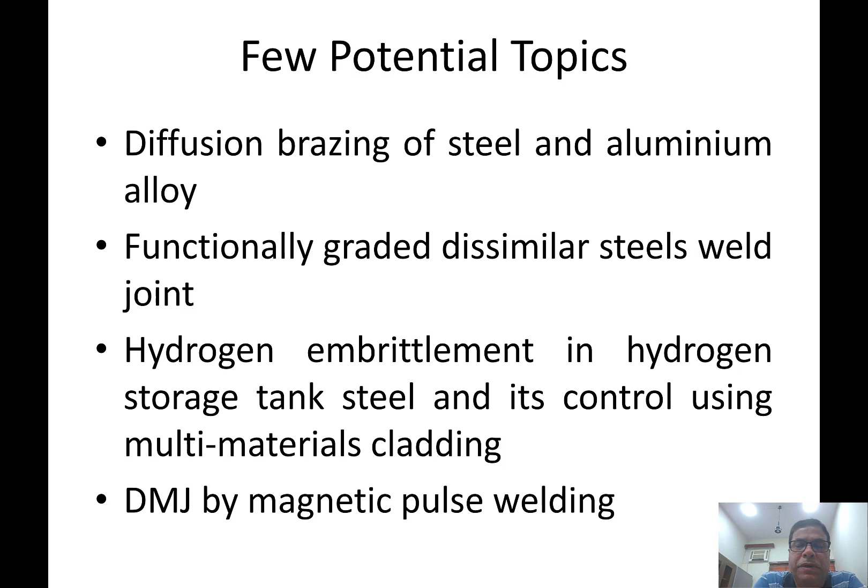Another new topic on which we are working currently is dissimilar metal joining by magnetic pulse welding. This is an electromagnetic based welding process where the joint is developed in the solid state. When we go for dissimilar metal joining, say A and B, two systems need to be joined, it will be best if the two can be joined without doing anything. That is the best possible solution, but it is not possible actually. Nothing happens automatically on its own. We need to apply either force or heat for that purpose.

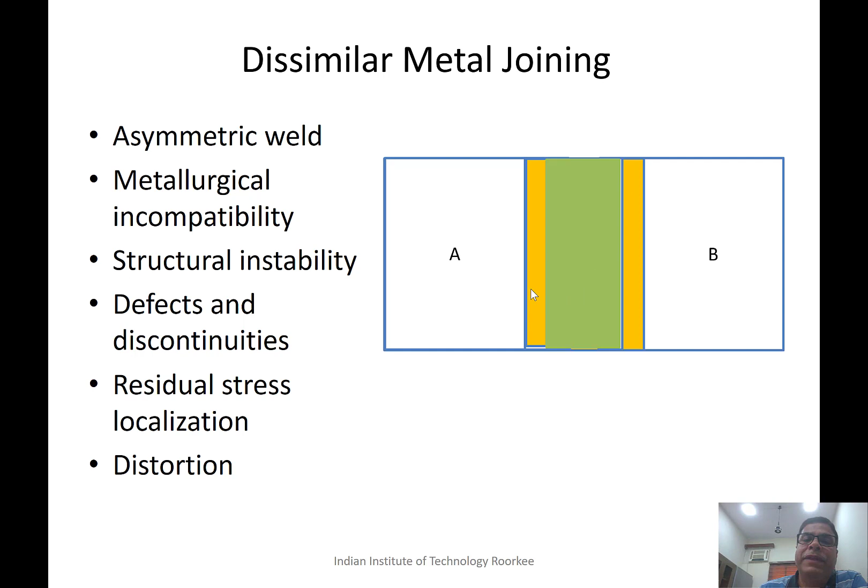So we can apply brazing or soldering kind of thing between the two. This will lead to very minimum effect on the base metals being joined. There may not be any melting also. But when we use a lot of heat for melting the edges of the components A and B to be joined, it leads to a weld metal which may be very hard, very brittle due to the metallurgical incompatibilities, and it also develops a heat affected zone on both sides, apart from residual stresses due to the differential thermal expansion behavior.

If we can develop a weld joint with the minimum possible heat, then it will be the best. But actually this is not workable. Why? Because for the development of fusion weld joints, we need to apply an optimum amount of heat, because either higher or lower heat will degrade the performance of the weld joint. The optimum heat will result in the best joint characteristics. If we go with lower heat input, it will result in increased weld discontinuities and stress raisers, which will degrade the joint performance.

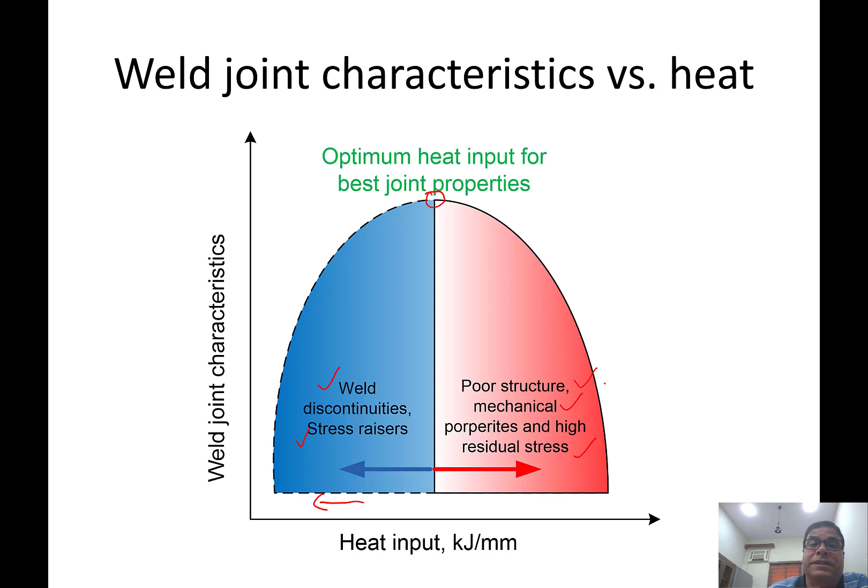On the other hand, whether we are developing similar or dissimilar metal joints, use of too high heat input will degrade the microstructure and mechanical properties, and even increase the residual stresses. That's why it is important to use the optimum amount of heat. So, in dissimilar metal joining, these are the important aspects that govern the ability to develop a sound weld joint and the joint performance.

One is that differential chemical composition leads to problems like the formation of unfavorable metallurgical features in the fusion zone. There may be unmixed zone formation, there may be unfavorable intermetallic formation. Then differential melting point can also create a problem, like the melting point of steel is, on one hand, 1500, and on the other hand it is just 600 to 700 degrees centigrade.

Then thermal conductivity: a lot of difference in thermal conductivity also leads to the varying distribution. The rate of heat dissipation will be completely different in the two cases, and differential thermal expansion coefficient leads to differential residual stresses being developed on the two sides. So differential thermal conductivity, differential melting point, and differential compositions lead to the asymmetrical weld joint like this.

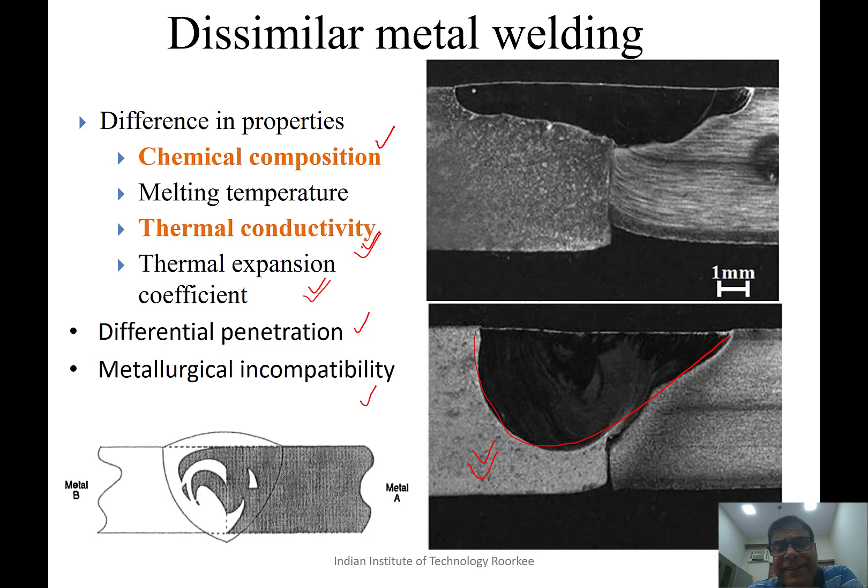If you see, heat is being applied at the center, but the weld is skewed towards one side, it is shifted towards one side. So this leads to differential penetration and the formation of unfavorable metallurgical constituents in the weld zone. That's why it is important to understand and investigate the various possibilities related with this.

Just for an example, if austenitic stainless steel is welded with ferritic steel by direct conventional welding, a direct connection between the two metals without any use of filler, it leads to a lot of difference in the composition across the two components. On this side ferritic steel, on this side austenitic stainless steel, there is a sharp gradient, a sharp change in composition in terms of the nickel and chromium equivalents.

So if you see, the black one shows the variation in the nickel equivalent, and the red one shows the chromium equivalent, and such a large difference leads to a lot of variation in mechanical properties and thermal expansion and contraction behavior, which in turn develops residual stresses and increased cracking tendency.

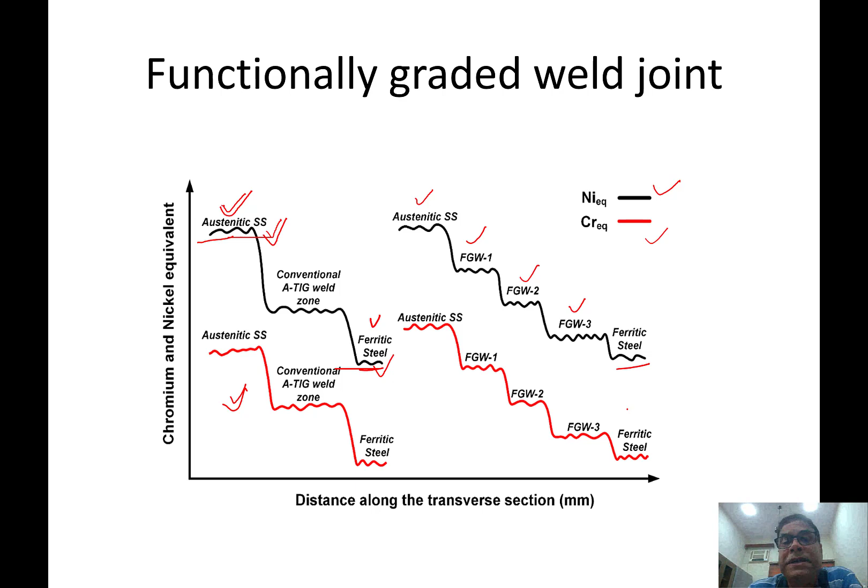So if we go for functionally graded weld joints, we can use different layers of functionally graded materials, FGW1, FGW2, and FGW3. These are three different kinds of materials applied for developing the weld joint across the ferritic and austenitic stainless steel. In this case, the gradient for chromium and nickel equivalent will be reduced, and this reduced gradient will help minimize the issues related with dissimilar steel joining.

Ultrasonic welding, magnetic pulse welding and explosive welding are examples of this kind of joining process. We have planned to develop a magnetic pulse welding system.

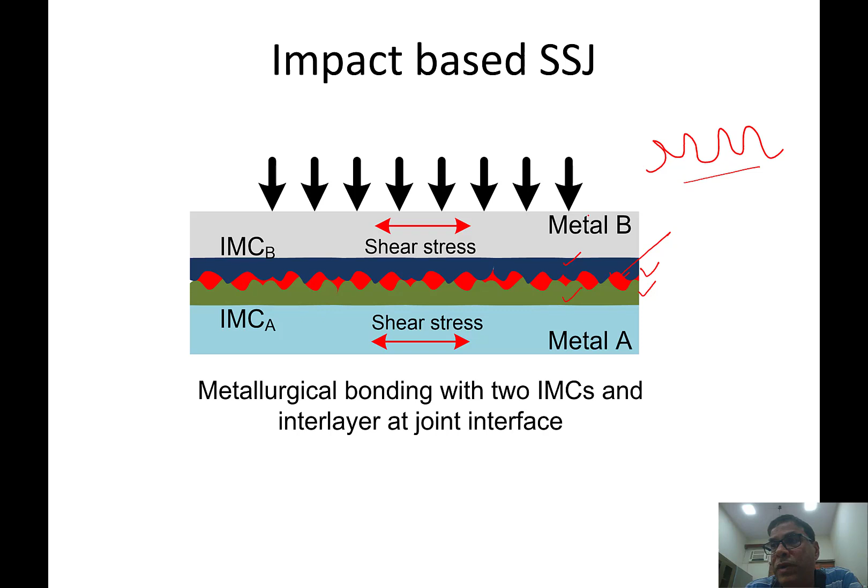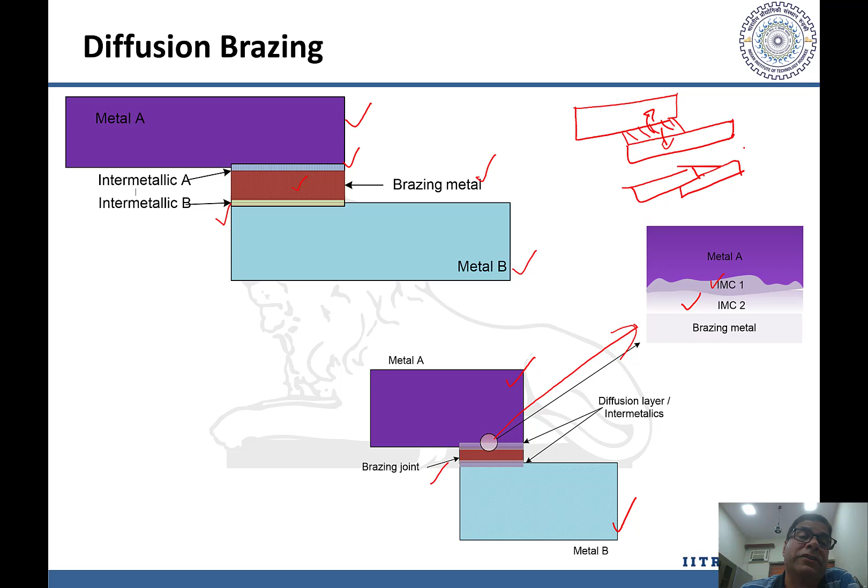If we see the magnified view of this, we will see a variety of IMCs being formed. It's important that these IMCs are favorable for good joint strength. Compared to this conventional one, when we use diffusion brazing, in the beginning we definitely have to apply the brazing material, but during the course of the diffusion brazing process, this entire brazing material gets diffused out. This leads to a joint strength almost as good as the strength of the weaker base metal.

The third one is where low carbon steel tanks will be cladded with functionally graded material, shown in the form of different layers. This system will be charged with hydrogen, and we'll see, as a function of time, how the embrittlement of the low carbon steel is getting affected. This is actually our net goal.

For the simplification of the process, we'll take a simple very low carbon steel and do the cladding of a variety of materials, just like this multi-material system, and then this will be charged with hydrogen, to see the extent to which it is affected when there is cladding and when there is no cladding. So this is another problem in which we plan to work. These claddings can be developed using additive manufacturing approaches like wire arc additive manufacturing or similar processes.